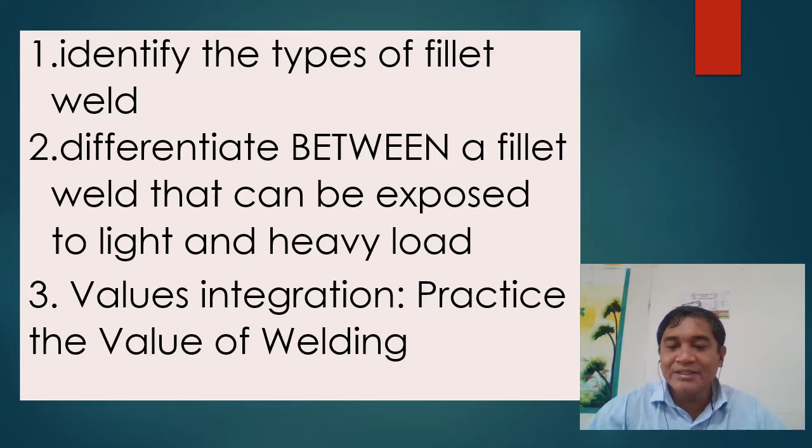The following are our objectives for this lesson. We have identified the types of fillet weld, differentiated between a fillet weld that can be exposed to light and heavy load, and we'll include also the value of practicing welding in our area. So before we go on, we consider first some of our local welding shops.

Particularly, we have the industry. I took time to take that picture in Tabon Repair Shop, and we have here the facilities for oxyacetylene and SMAW procedures. The first picture there is the finished product.

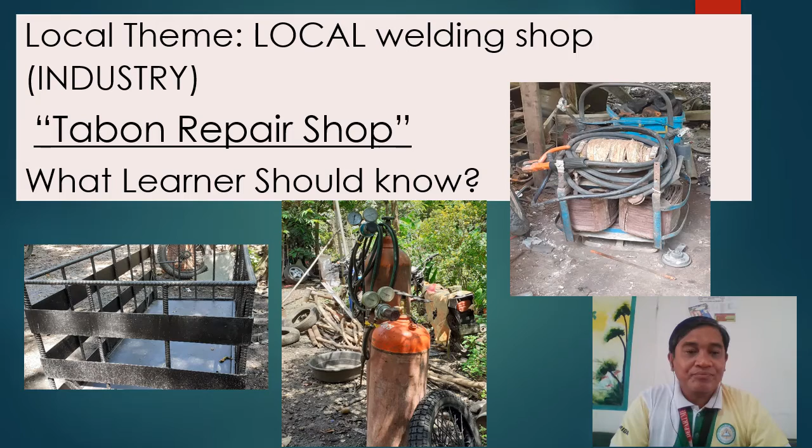This is a local welding and repair shop located at Barangay Macario, Merida, Leyte. This welding shop will accept slight and major repair for cars and motorcycles, that often involves welding, SMAW, or oxyacetylene procedures.

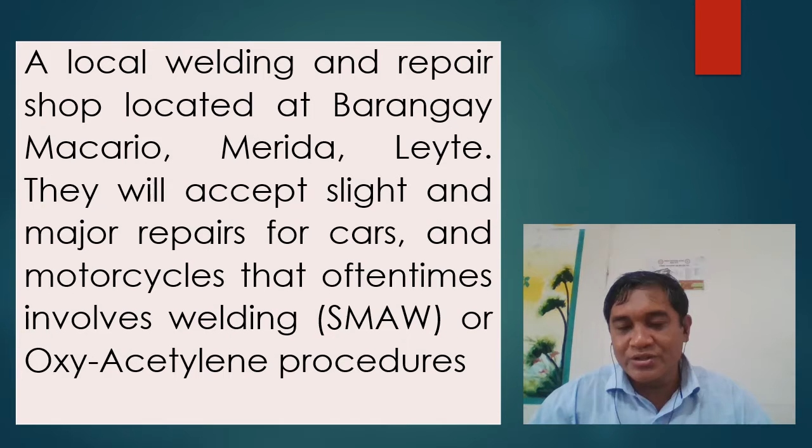It's important that we can learn how to weld using SMAW and oxyacetylene because this kind of skill is available and relevant to our local place, so there are shops in which we can be employed or practice welding.

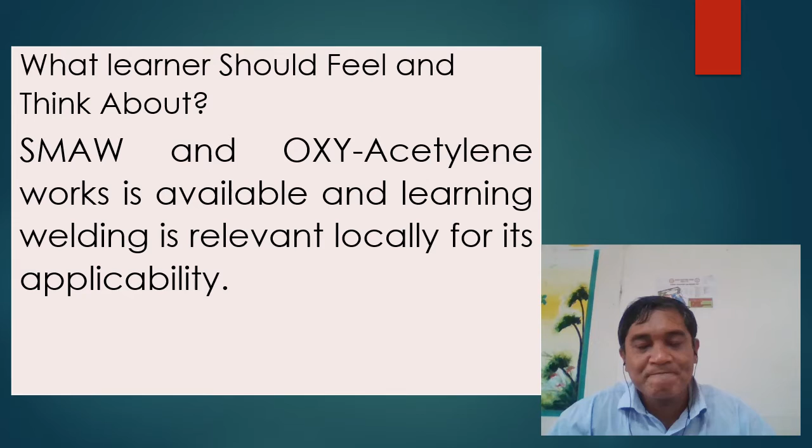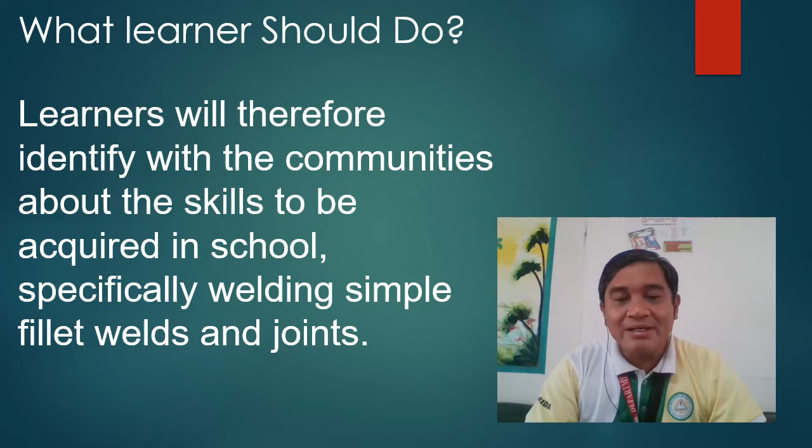What should the learner do? The learner should therefore identify with the communities about the skills to be acquired in school, specifically welding, simple fillet welds, and joints — the shops around us that work with oxyacetylene and SMAW welding.

So what do you do if you need a heavy duty load or heavy duty welds? The answer is you need a heavy duty fillet weld. On the picture we can see the finished product, a carrier that can sustain heavy loads because it's supported with different types of fillet welds.

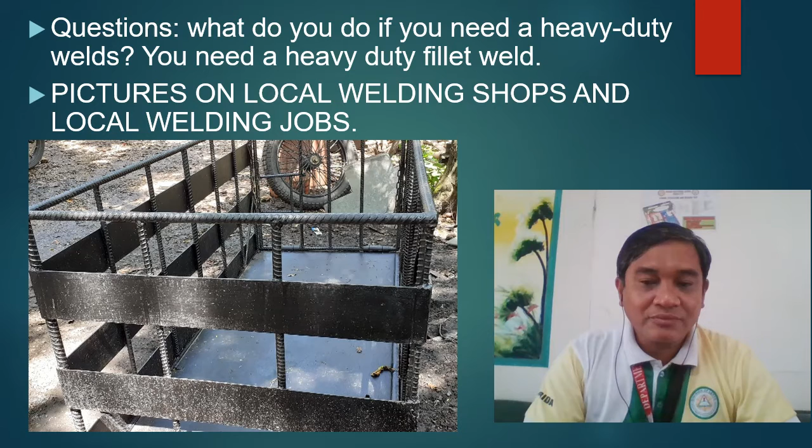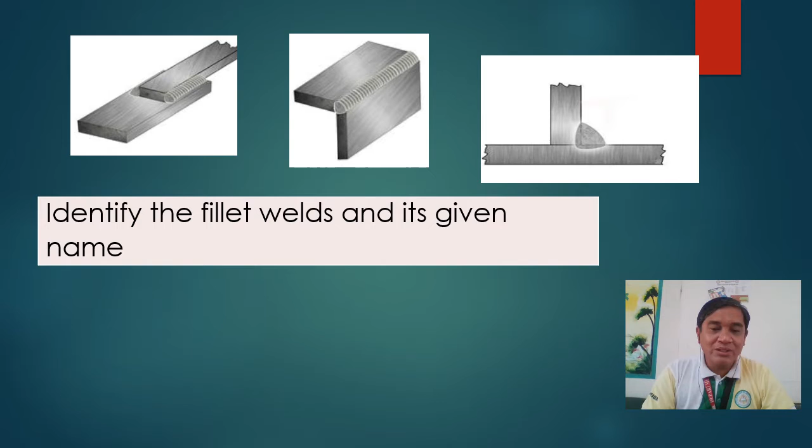Okay, let's move on to the next process. Here we have three pictures, and I don't know if you can identify those. What you're going to do is identify the fillet welds and their given names — the first one, the second one, and the third one.

So based on that, how many types of fillet weld are there? Yes, of course, you have three. So describe the edge preparation of a fillet weld — the first one, the second one, and the third one. Okay, can you guess?

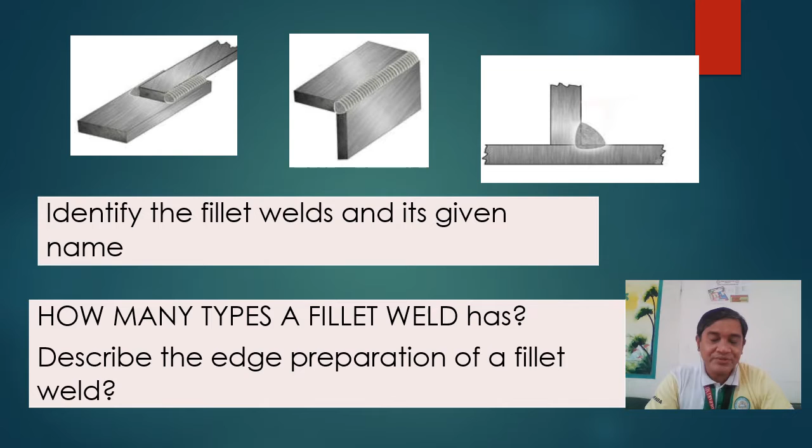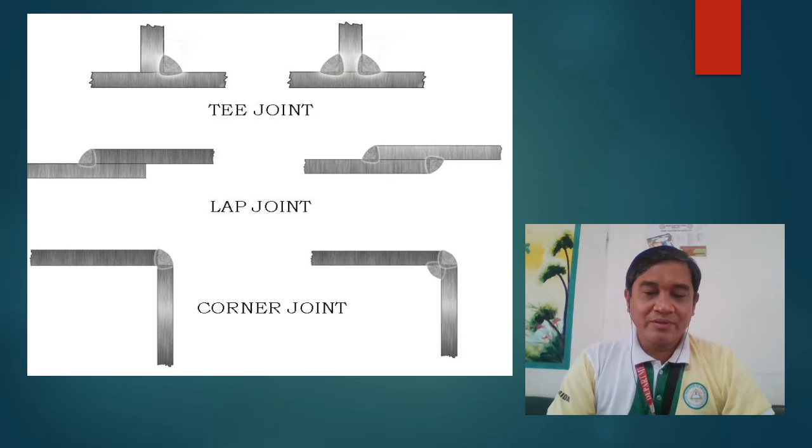What is a fillet weld and kinds of joint? The fillet weld is the most popular and commonly used weld in industry. It requires little or no edge preparation.

Single fillet welds are fillet welds that have filler metal deposited on one side, so they are limited to smaller loads than double fillet welds. The difference between double and single is just for smaller load, while double is for more load. Double fillet welds have filler metal deposited on both sides to provide additional strength, and may be equal or unequal.

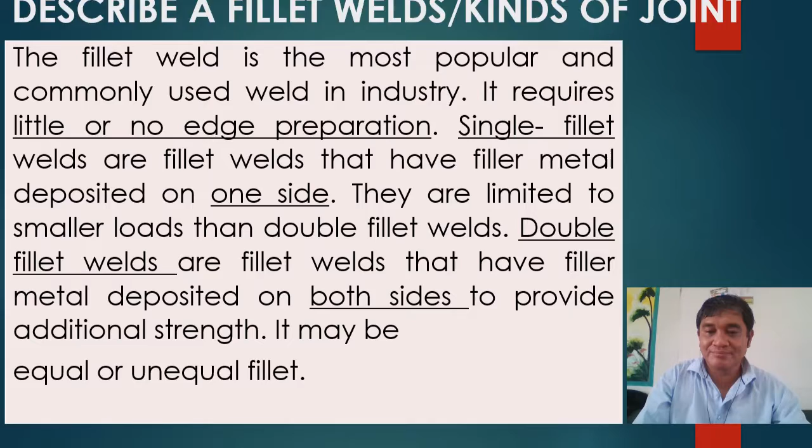One of the types of joint is the lap joint. It is used in all kinds of work, which may be single fillet lap joint or double fillet lap joint. So what's the difference between single and double fillet lap joint? Single fillet lap joint is not as strong as double fillet lap joint.

Double fillet is more used in ordinary works, so single fillet lap joint should not be used if the root of the joint is to be subjected to bending. This type of joint should never replace the butt joint on works under severe load.

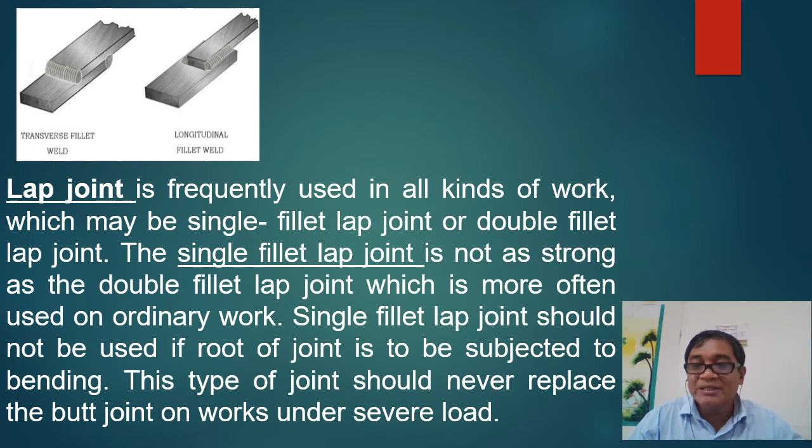The next one, the corner joint. So what is a corner joint? A corner joint is a weld joint formed when two members are positioned at approximately 90 degrees. That's 90 degrees when two parts are joined together.

Heavier plate can be welded if the load is not severe and there is no bending action at the root of the weld, so no edge preparation is needed and fit up is usually simple. A half open corner joint may be used on 12 gauge up to 4.5 mm. A full open joint can be cut absolutely square, and suitable clamping and holding devices are needed to facilitate fit up. So that is a corner joint.

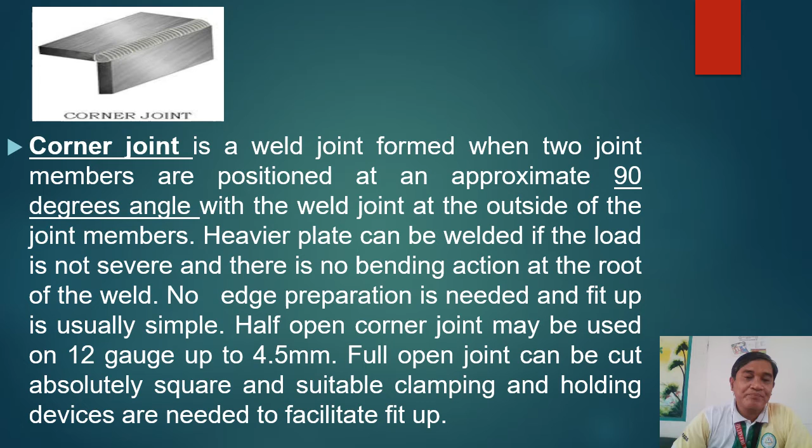Okay, so here's the last one. You can guess it is the T joint. The first picture shows there is no edge preparation. A T joint is a welding joint at the junction of two parts located approximately at a right angle to each other, in the form of the letter T.

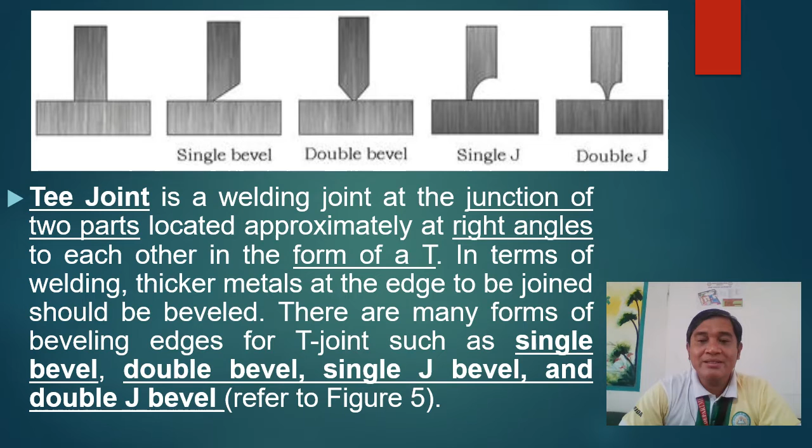In terms of welding, thicker metals at the edge to be joined should be beveled. The thicker the metal, the more edge preparation you need. There are many forms of beveling edges for T joints: the single bevel, the double bevel in the center, the single J bevel on the right side, and the double J bevel. You can apply that if the metal is thicker.

Okay, so here comes again: we have the T joint, the lap joint, and the corner joint.

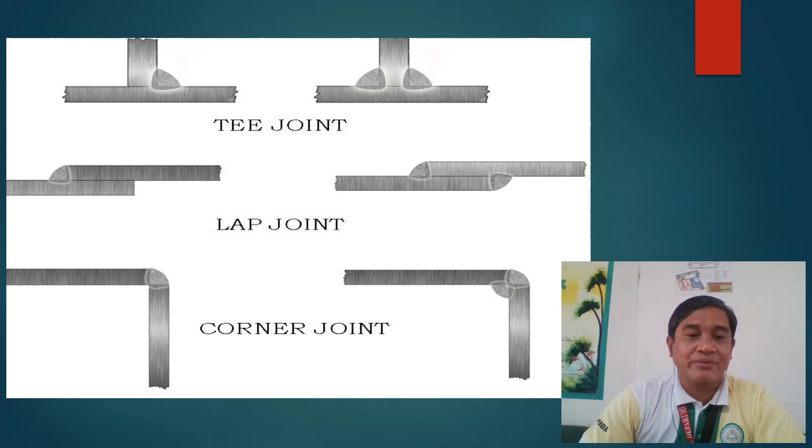Let's have a little application here based on our local heritage. The local industry, namely local welding shops, will be able to cater to any welding jobs asked by the clients. So it's either they will use a simple T-joint, single bevel or double bevel, or they will use the corner joint or the lap joint. It depends on the demands of the job.

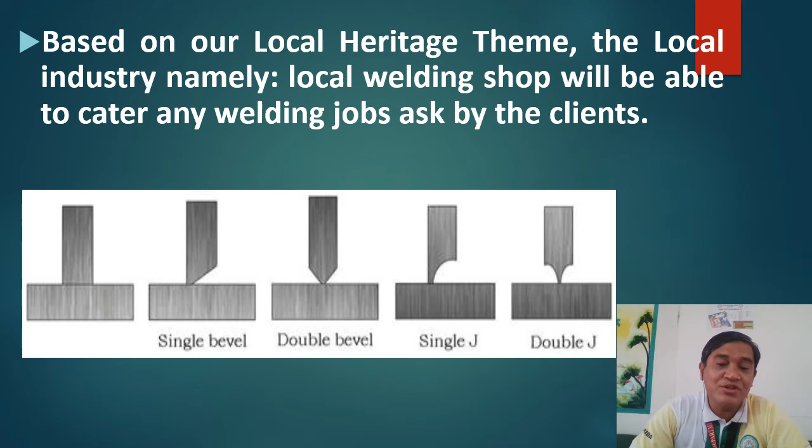Okay, so it's evaluation time. I hope you learned something. Let's see how far you've learned. Are you ready? You can take extra paper and write the letter.

Number one: these are fillet joints that have no edge preparation except blank. Number two: the fillet joint used for severe load is blank. Number three: when two joint members are joined to form 90 degrees, it is a blank joint. You have the choices there. Number four: a joint of two parts to form a right angle to each other is: A, corner; B, lap; C, T; D, double T.

Number five, letter A: what do you call it when a fillet joint has a double weld on both sides? A, corner; B, lap; C, T; D, double T. Are you done? For letter B: how will you apply it if you need a weld that can sustain a heavy load? You will cite an example. That's good for 10 points, so you have 15 points in all.

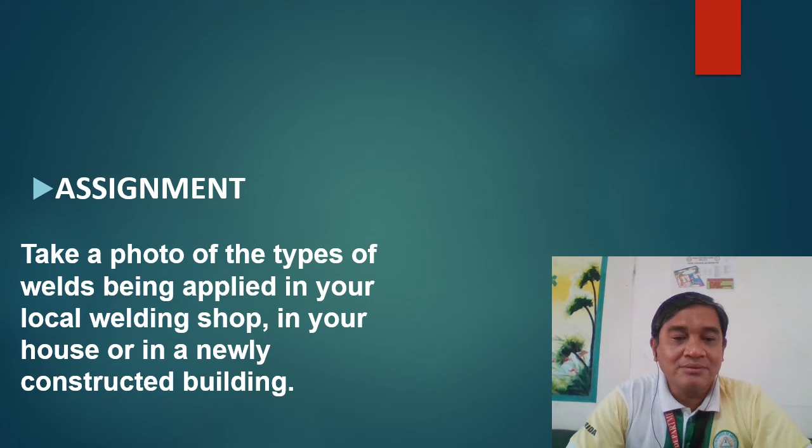Okay, let's check. Here comes the answer key: for number 1, letter D; number 2, letter D; number 3, letter A; number 4, letter C; and number 5 is letter D. For the question of letter B, you can apply a double J or bevel joint to sustain a heavy load. So if you need a heavy load, you can use a double J or bevel joint. I hope you get a passing grade.

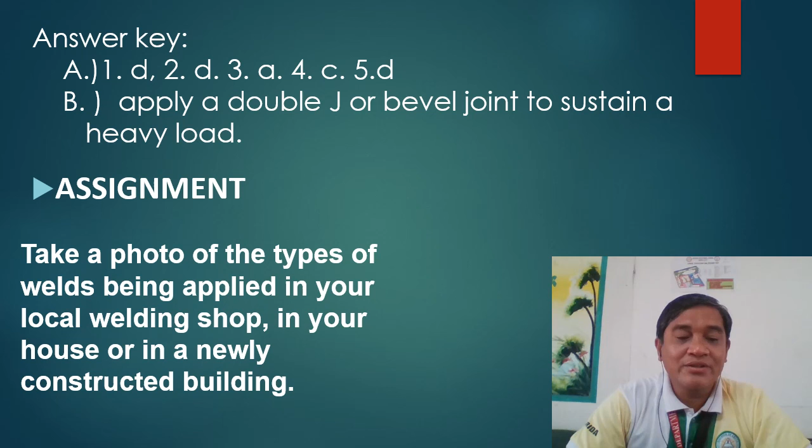For our assignment, you take a photo of types of welds being applied in your local welding shop. You can visit a welding shop, or in your house if you have some metal frame or welding jobs being done at parts of your house, or you have a steel gate, you can take pictures, or a newly constructed building, you can take pictures there too.